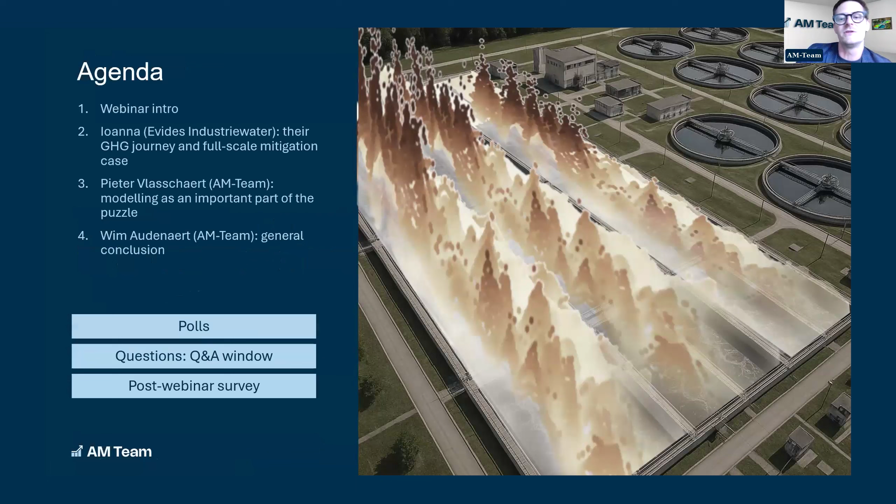So what is the agenda? What is the menu for today? I will start with a small intro of this webinar and set the scene a little bit on the nitrous oxide emissions. And then we will have a very exciting lecture by Ioanna from Evides Industriewater. So she is our guest speaker. I will introduce her a bit later. And she will be talking about their journey at Evides Industriewater, but also a full-scale mitigation example. So she will be presenting quite a bit of slides that have valuable information.

And then we have Pieter Vlasschaert from our team. He will be zooming in further on the application of modeling, because we believe it can really, and it is actually, playing an important role already in that puzzle. And I will end with the general conclusion.

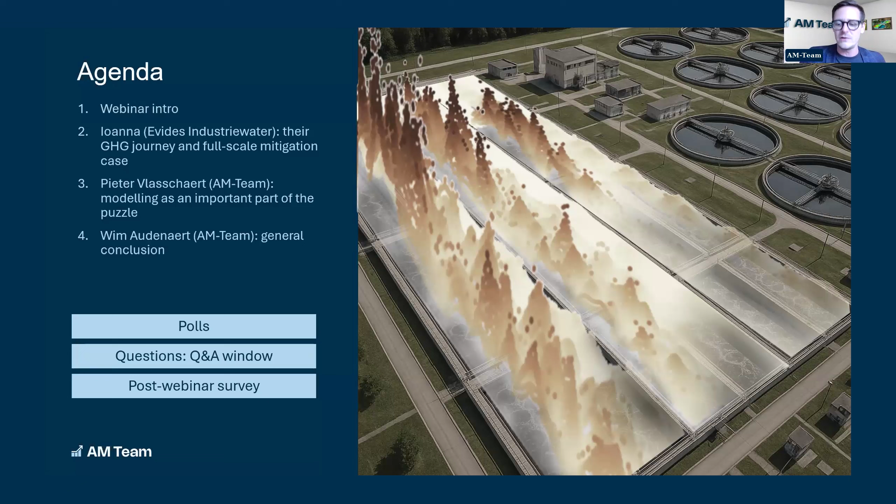Small introduction, one slide about AM Team, just in case you don't know us yet. We provide modeling and data services and digital twin solutions to the water industry worldwide. Specifically, we focus on big challenges. It is not only nitrous oxides, it can be also a lot of other topics, including reuse, micropollutants, wastewater treatment, enhancement of drinking water treatment plants, digitalization. So all of these things together.

We are headquartered in Belgium, but we have a global reach. You can see some of our customers on this slide. They are quite international. And we assist those customers in the planning stage, in the design stage, in the operations stage. And now digitalization is a topic on its own as well. So we also built digital twins for these customers. And we work very closely together with all of the stakeholders. So this means engineering companies, software companies, sensor companies, utilities, and users. We work closely together with them, because our core focus is building these digital twin models and the computer models. And then we work with other partners and solutions.

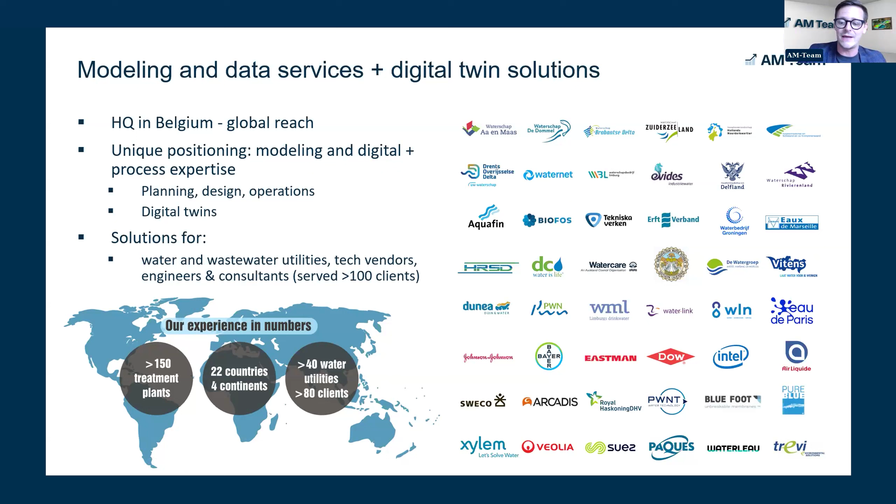So up until now, we have served over 100 clients throughout the last 8 years. So it's really adding up a lot. And specifically in the area of nitrous oxides, it is growing.

So I am Wim Audenaert. I'm CEO and co-founder of AM Team. And I will be presenting part of it today. But then we have another presenter who is my colleague, Pieter Vlasschaert. He is the VP Sales and Solutions within AM Team. Pieter will be zooming in on some topics of the modeling and the applications at full scale. And then we have our guest speaker, Ioanna Gkoutzamani from Evides Industriewater, and she will be going over their journey and a full-scale mitigation case example.

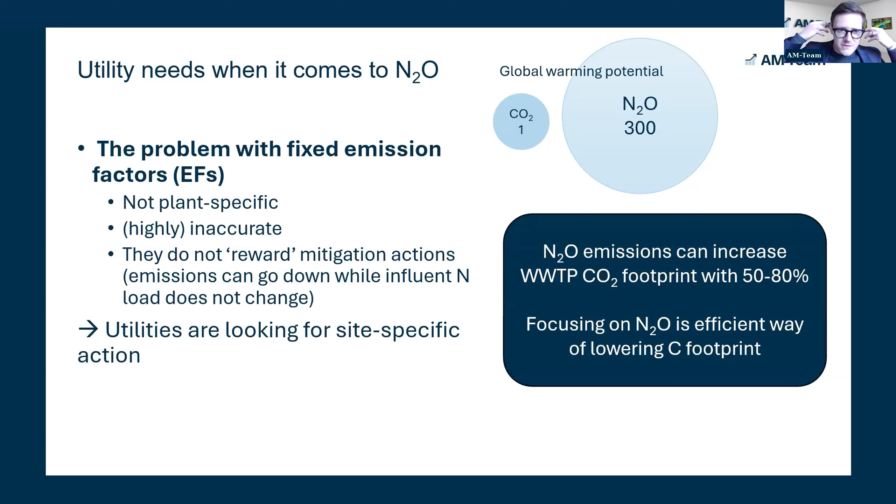So there are a couple of flaws here, and this is why an increasing number of utilities are looking for site-specific action. And action means you start quantifying or monitoring on sites, you start modeling, you start mitigating, you are starting to think about site-specific nitrous oxide emissions. When it comes to those actions, there are actually 3 big groups utilities are looking for right now. That's what we learned when talking to a lot of utilities.

The first one is quantification. You want to know do you actually have an issue and how bad is your issue? What are we emitting and what are the emission dynamics in the long term, short term? Then the second question is, okay, when we have those emissions, we should understand what is causing it and what is the potential to reduce so we can make a plan. So this is the understanding phase.

And then we also have mitigation, which is the end goal, in fact, how to reduce our emissions. So I will repeat again, even though quantification and understanding are very important, the real end goal is mitigation. We should really not forget this.

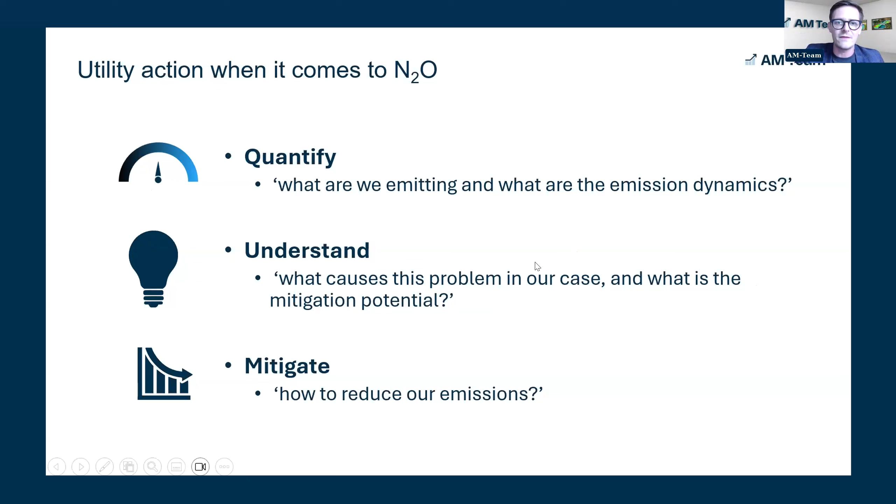So when we look at the mitigation actions and when you mitigate nitrous oxides, it is important that you don't forget the core needs of a utility. You are still treating wastewater, and that is there for specific reasons. You want to meet a certain effluent goal with a certain plant efficiency. And of course, recently now we have to juggle this third ball of the emissions. It is important that if you reduce emissions, you don't hamper process efficiency or effluent quality.

And the good news is, this is what we call the 3 E's. The 3 E's can be handled together when you are mitigating. And Ioanna's example will also illustrate this, okay? But this is very important. The core focus of wastewater treatment is to treat wastewater and achieve a certain quality with a reasonable cost and efficiency. And of course, with as low as possible emissions.

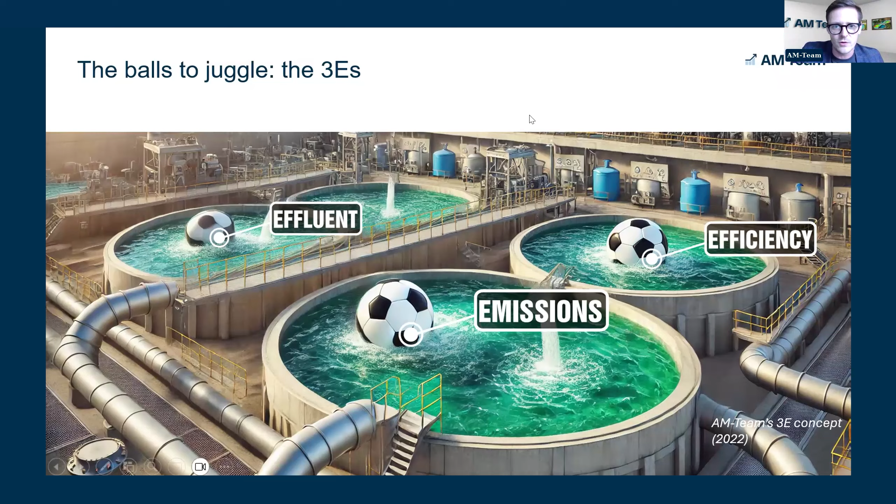That is super important. So I will quickly introduce the project now that we worked on together with Evides Industriewater. Ioanna will start talking in a few minutes. This is about a full-scale plant in the Netherlands, and I want to provide some context that is important for you to get the case very well. The first thing is, Evides Industriewater was actually in the process of quantifying their emissions already. They were quite an early adopter. They already do actions for quite a while.

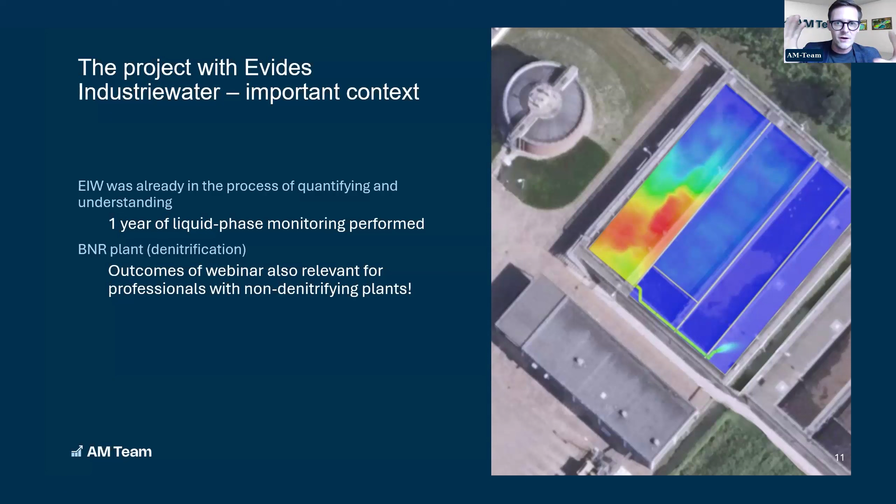And at the very moment that we started working with Evides Industriewater, they were already measuring at that site for 1 year with liquid phase monitoring. These are the Unisense sensors. This is a BNR plant, biological nitrogen removal. This means you have denitrification taking place. A lot of the mitigation actions will be on, for example, the denitrification. Despite that fact, people here in the webinar that don't have denitrification can, of course, also learn from that. I just want to highlight that. See it as a generic mitigation learning experience, okay?

And this brings us to Ioanna, our guest speaker. I will quickly take my notes here so I can properly introduce Ioanna. So Ioanna is a process engineer at the R&D team of Evides Industriewater. She is focusing on various topics, including reuse, resource recovery, and of course, nitrous oxide emissions reduction and research. And her background is civil engineering from Aristotle University in Thessaloniki in Greece, with a specialization on hydraulic and environmental engineering. And her master's was in Delft in the Netherlands in water management, at Delft University of Technology, quite a well-known institute. So, Ioanna, we are very curious about your presentation.

Perfect. Thank you, Wim. Hello, everyone from my side as well. As we explained, we've worked together in Evides Industriewater with the AM team to quantify and mitigate laughing gas emissions, nitrous oxide emissions, in one of our full-scale plants. We have prepared a few slides to take you with us in this journey. First, some information about Evides Industriewater. We are providing customized water solutions for industrial clients, and that can be process water for several industrial processes like cooling, but also demineralized water and wastewater treatment.

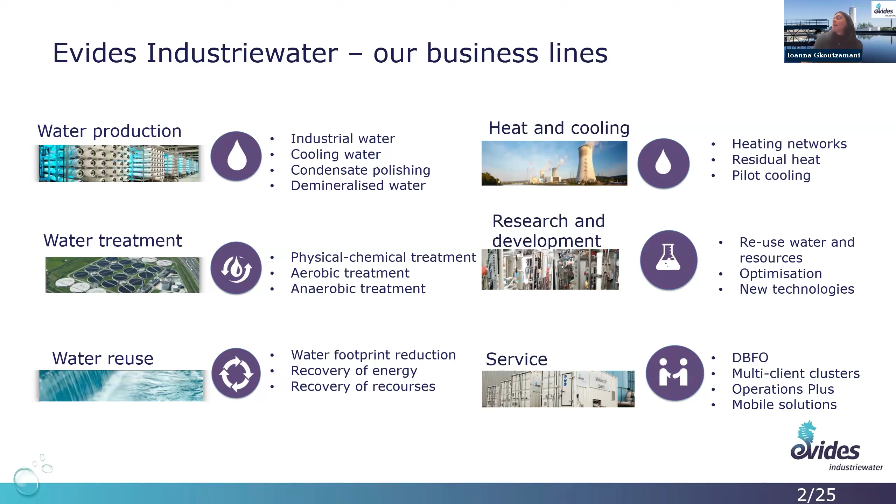We are focusing a lot on options for water reuse and resource recovery, and this is also the focus of our R&D department, but also we are trying to find ways to optimize our existing processes and minimize energy use or lower our N2O emissions. And this project belongs to that part of the company. So in general, our environmental policy is that we try to reduce our CO2 footprint, use more renewable energy, reduce our emissions, and of course, not contribute to water scarcity. So have better recoveries, reuse water as much as we can, and reduce our pollution to the water bodies. So there are ongoing projects for all these fields.

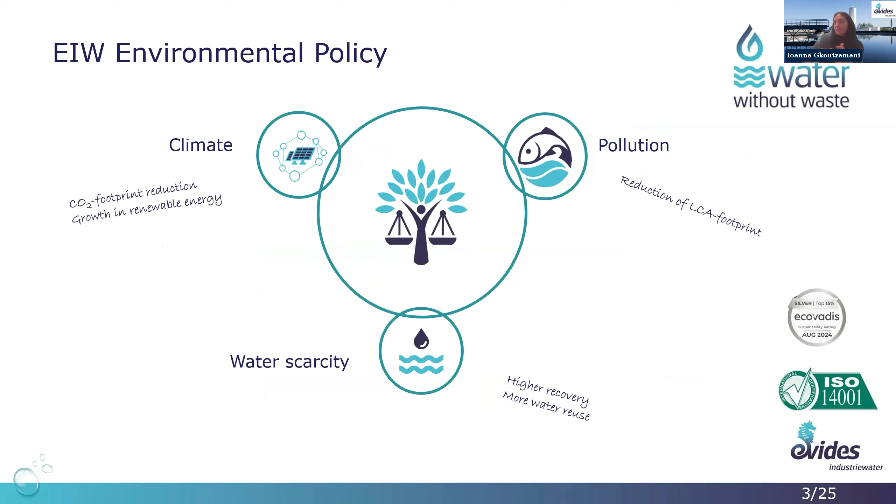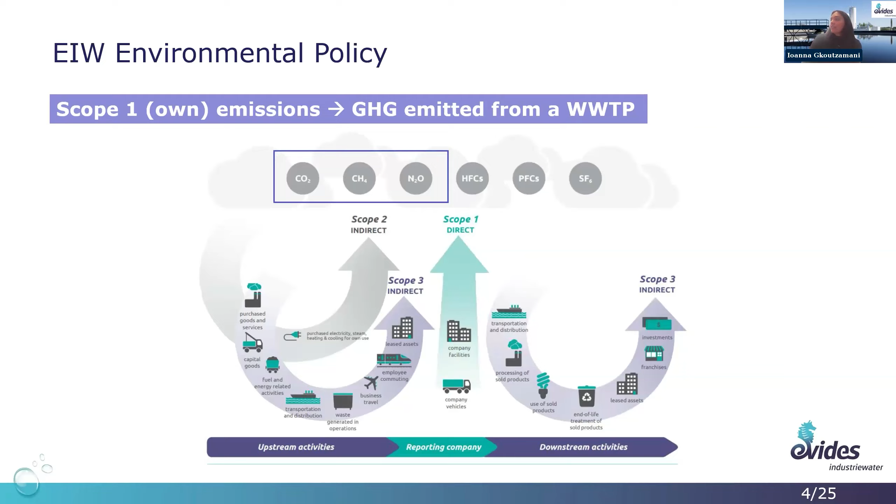And then specifically for the greenhouse gas emissions from wastewater treatment plants, the main three contributors are CO2 emissions, methane, and nitrous oxide. And the nitrous oxide, based on literature, is one of the biggest contributors, as we mentioned. But this is something we have already seen.

Then the aim of this research was at first to quantify the emissions, to know our baseline, knowing what laughing gas is being formed at which moments. Thereafter, to understand why it's being formed. So what are the formation mechanisms and what factors that we might be able to change contribute to this formation of laughing gas. And finally, of course, try to identify mitigation measures and implement them.

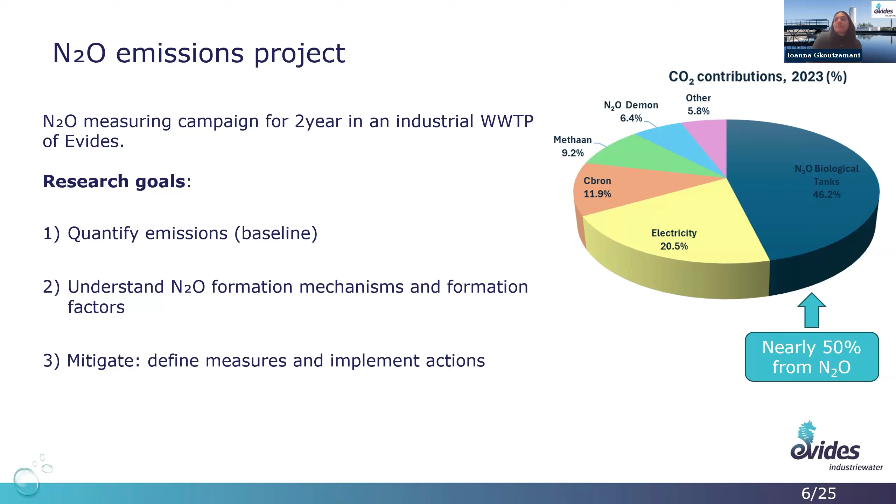So a few information about this industrial site. It's a conventional activated sludge system with denitrification and nitrification. The influent, even though it's called industrial plant, is similar to municipal, but it's much more concentrated, like 5 times more concentrated than typical municipal, and has less COD compared to a municipal. And also the daily and weekly patterns are different than a municipal plant. And of course, for a laughing gas research, the focus was in the denitrification and nitrification tanks, specifically here highlighted with red.

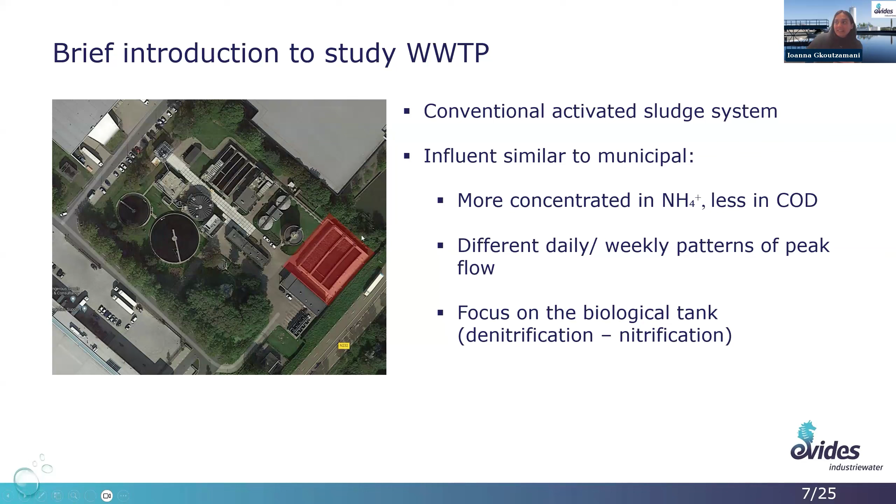Then the approach followed. First, as we said, we wanted to measure. So we chose for liquid phase nitrous oxide monitoring. That's already happened. Then we followed with data analysis from our side, and also in collaboration with Brunel University of London, we had a multivariate analysis. And thereafter, we proceeded with model-based root cause analysis and model-based mitigation strategy testing with the AM team. And now that we have found our mitigation measures, that I will come back to later, we are in the phase that we are trying to implement them in full scale, and thereafter continue monitoring to be sure of the effect.

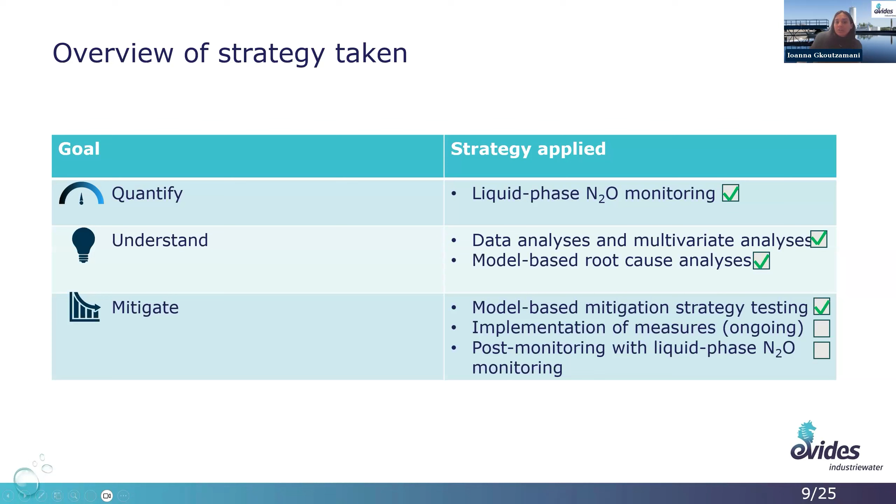Then, for the measurements, we chose the Unisense sensors because they measure in the liquid phase. We know that measuring in the gas phase might be more accurate when it comes to the actual emissions estimation, but if you want to identify mitigation measures, you need measurements inside the water, because you want to be able to compare the moment you see a formation of N2O with what else was happening at the same moment. Because if you measure in the gas phase, what is being emitted in the air at that moment might be formed a bit earlier.

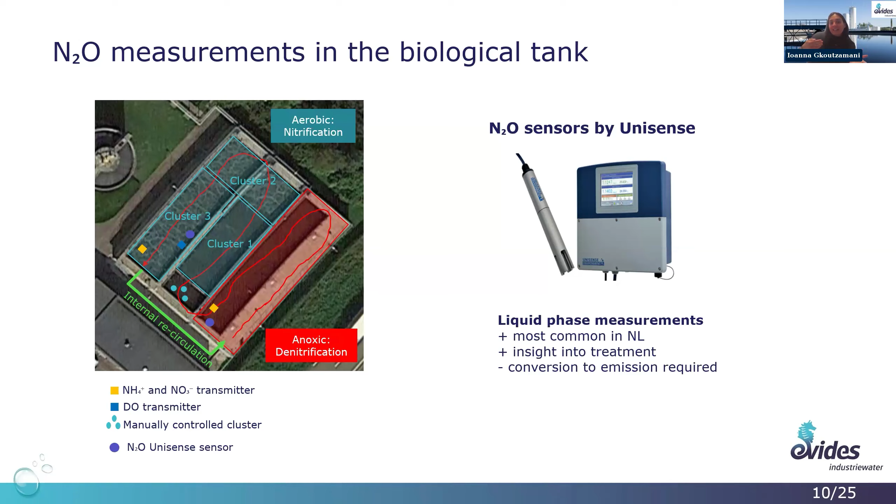Then let's go to the main outcomes. So 2 years of measuring campaign from December 2021 until January 2024. What we have identified: the average formation factor comes really close to the IPCC number, around 0.016 kilograms of laughing gas per kilogram of ammonia being treated. But this is the average of the 2 years. If you take different periods, at some periods it will be much more, and at some periods much less. So there is a seasonal profile with higher formation when the temperature of the water goes down, so during autumn and winter. And thereafter, we also found a daily profile that was repetitive, and then a mitigation measure that was identified and tested with a model of AM team.

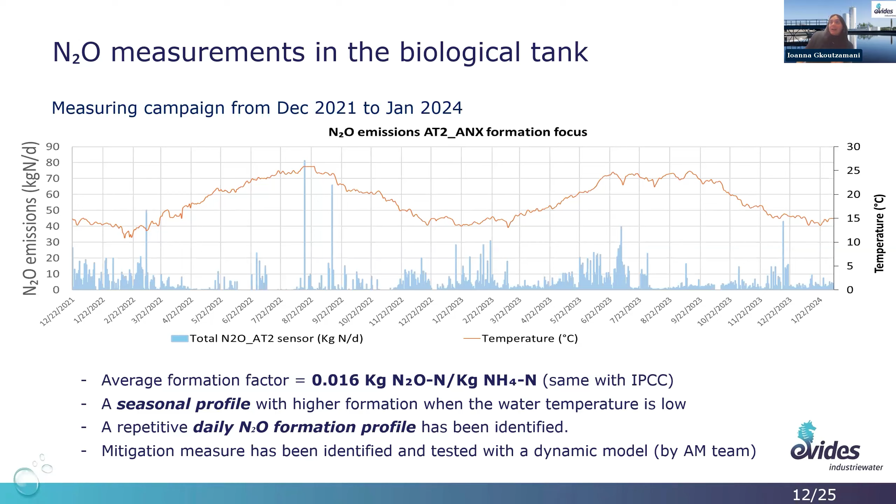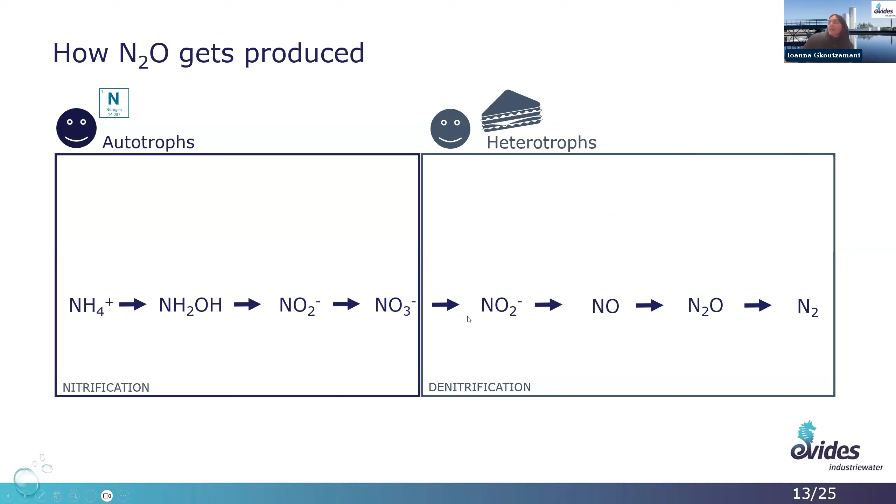Now, before we go into details of what all these things mean, let's remember what N2O is and how it's being formed during nitrification and denitrification. So here we have nitrification from ammonia to nitrate, and denitrification from nitrate to nitrogen gas. Then you have 3 main pathways. In the nitrification, it's through hydroxylamine oxidation, when you have high DO and high ammonia loads incoming to your tank, or the other pathway that is through AOB denitrification, when there is low presence of dissolved oxygen and high concentration of ammonia or accumulation of nitrites.

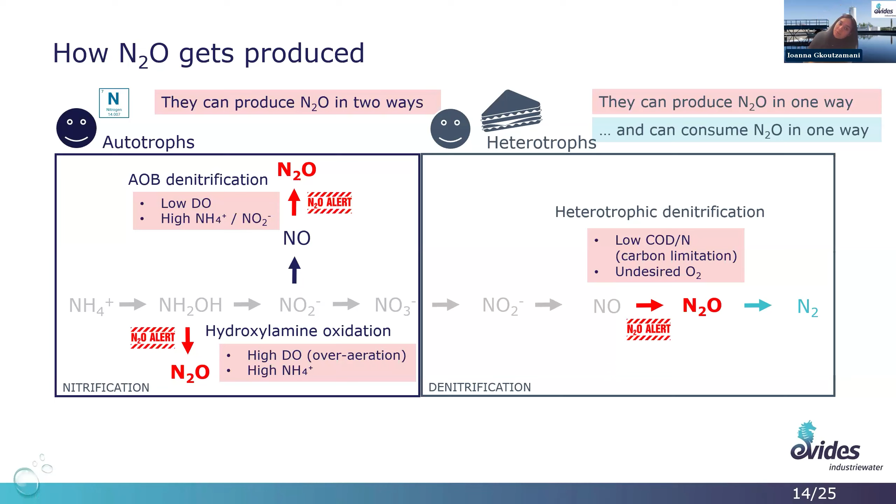And then in the denitrification side, the heterotrophs are able to produce N2O, but also consume it because it's an in-between step during denitrification. But to do this, they need COD, a carbon source. And if you have carbon limitations compared to the amounts of nitrogen coming into your tank, then you might stop at an earlier step of this process, either at NO2 or N2O. And both would end up in the formation of N2O, because accumulation of nitrite will end up, by AOB denitrification, becoming nitrous oxide. So this is how it was formed. And now let's have a look at the daily repetitive profile. So you can see here, well, one moment.

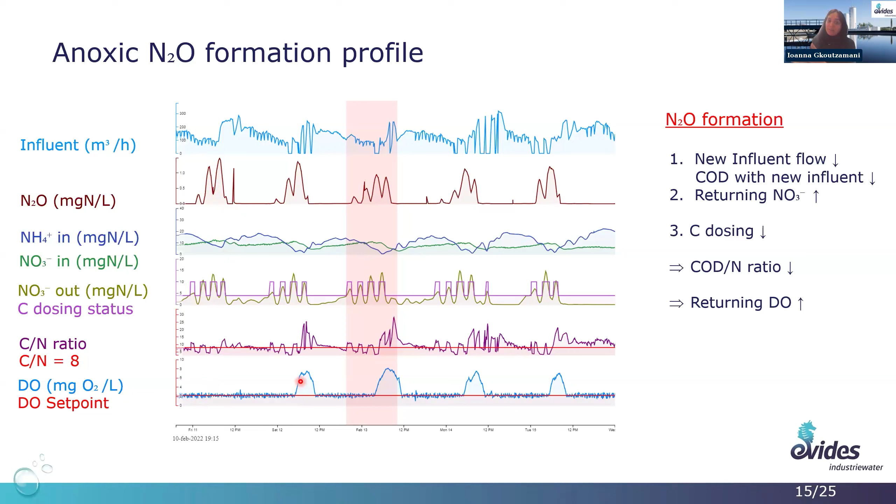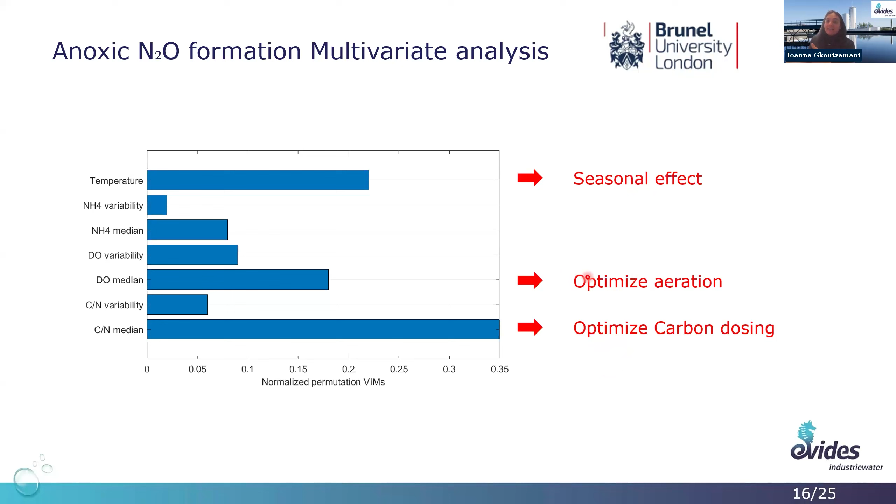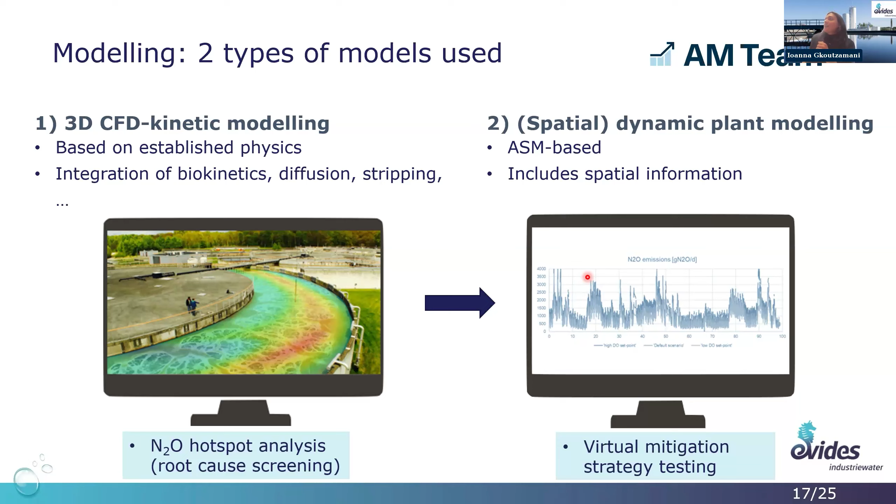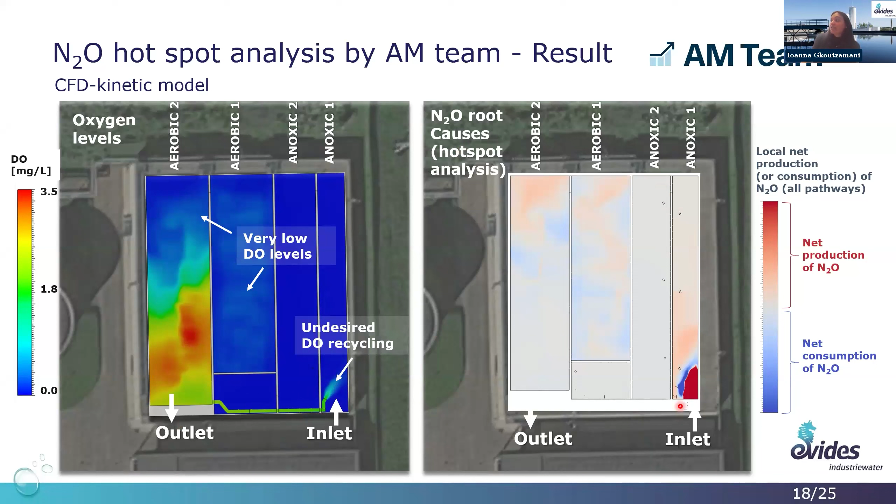And on the right picture, you see the N2O production and consumption throughout the whole tank from all the pathways. And then we could see some net production of laughing gas that was caused, for example, by the returning oxygen, so AOB denitrification at the point of the return. Don't be confused by the intense two colors, because these are from the main production and reduction of laughing gas during denitrification. Then you also have N2O production due to carbon limitation. And then we could see also N2O production due to low dissolved oxygen during aeration, and that's again AOB denitrification.

And when AM Team took all these parameters together and quantified them, we were able to see that the biggest contributor to the N2O formation in this specific case was the nitrifier denitrification, so AOB denitrification, but from incomplete denitrification and accumulation of NO2. So we will have lack of carbon that will result in incomplete denitrification, that will result in accumulation of NO2, and this NO2 was everywhere in the tank, and AOB could take this NO2 and make it nitrous oxide.

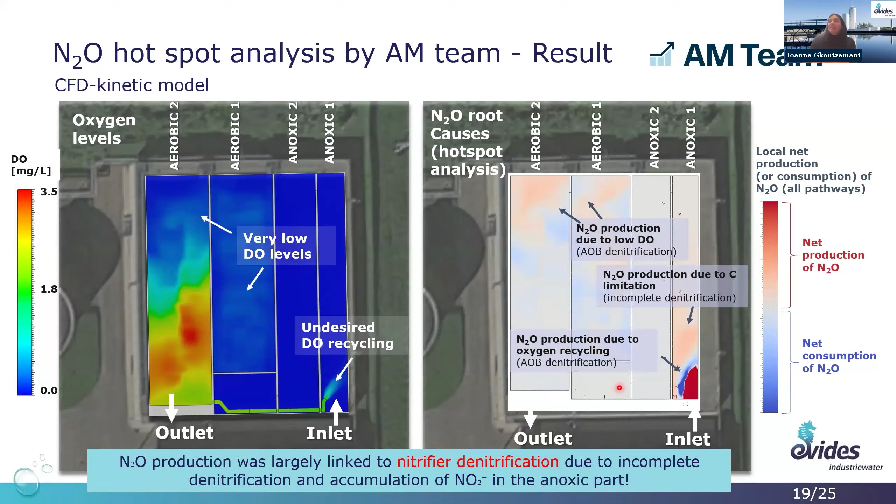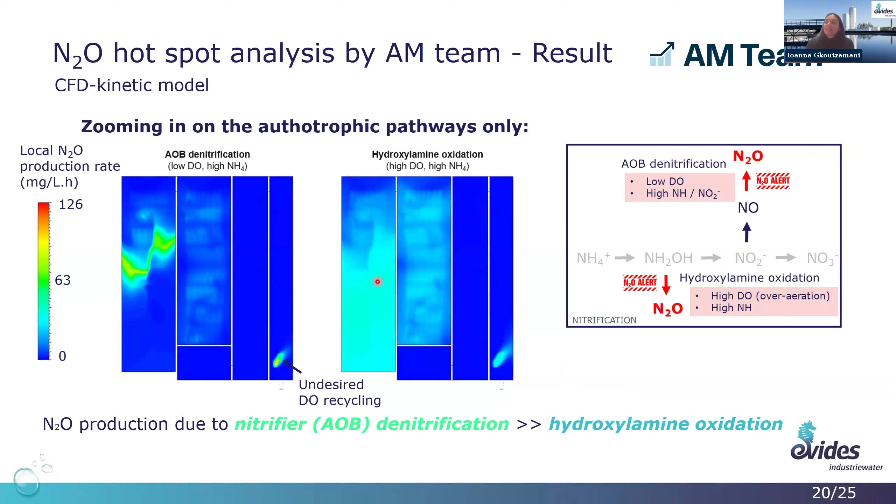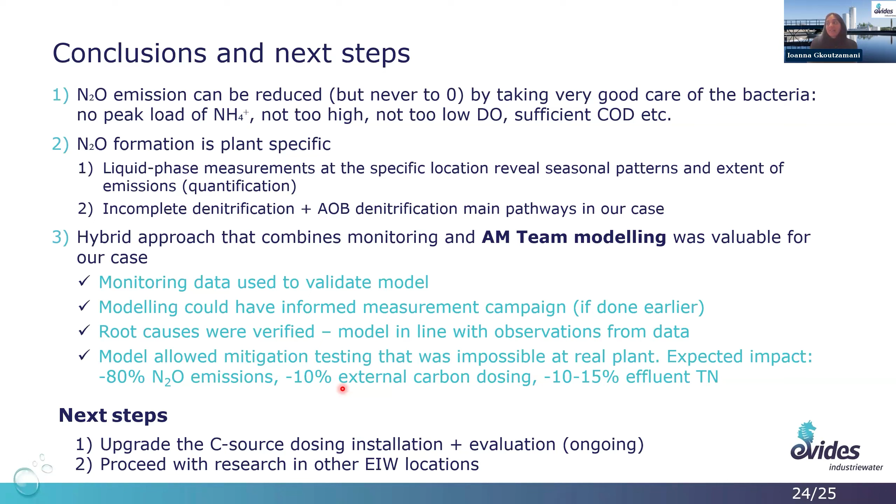So the next steps are to upgrade our carbon dosing installation and evaluate, and we are right now working on this. And we proceed with research in our other Evides Industriewater locations. So that was my presentation.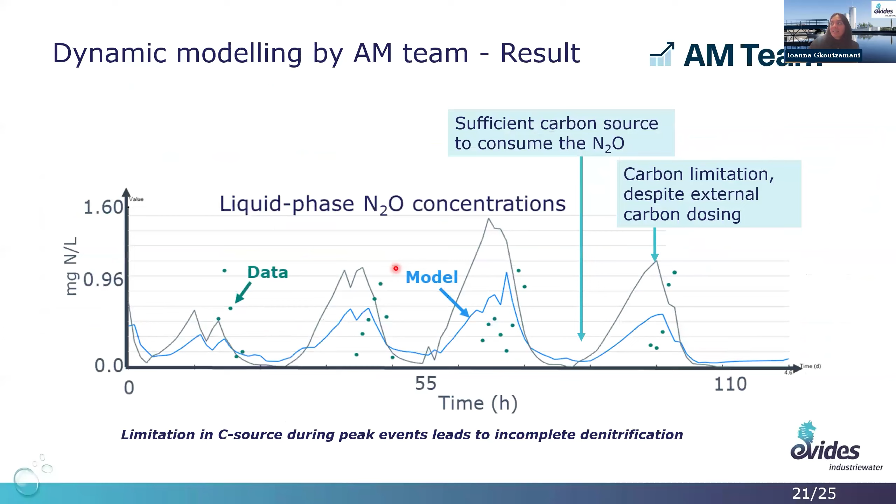There are no data, green dots, in the other scenarios. Correct. Yeah, because this is a model, so the actual measurements are only in the base case. And we see that the model, the blue line, coincides quite well with our actual data. And then for the rest of the scenarios, you can imagine the actual data at the same moment, but it's what the model virtually expects, and we didn't test them in full scale.

We are going to implement it in full scale once we upgrade our carbon dosing based on scenario 5, and then we can validate our expectations in real life. But we believe it will work, and we are going to do a really big investment to implement it, because our carbon dosing upgrade needs quite a big investment, I would say. Because we have validated this outcome from our own observations, from a statistical analysis, but also from a dynamic model that takes into account the biology behavior.

And then related to those investments, Ioanna, we have another question. What is the main driver for Evides Industriewater to really work on this and even invest in this? Laughing gas reduction. Correct. So in Evides Industriewater, they take it quite seriously right now. We have dedicated studies on methane and nitrous oxide formation in all of our plants, trying to understand where we stand and wherever we can find mitigation measures.

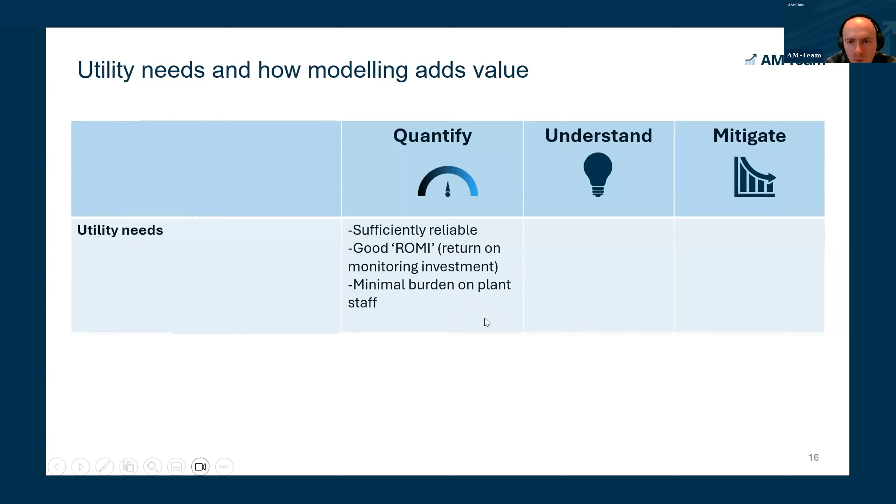But if we zoom in a little bit more on the quantification needs, quantification really comes with challenges, and I think it's extremely important for utilities, if you want to quantify the emissions and assess your baseline, that this quantification is done sufficiently reliably. For example, it means measuring at the right location to quantify your emissions, because there are so many gradients in reactors, you need to find the good spot depending on your reactor. And then also, if you have a lot of different wastewater treatment plants or very big reactors, it's also very important to have a good return on monitoring investment.

You will do measurement campaigns, but is it a good idea to measure for 4 years, for 5 years? How many sensors do you need? So a good return on that is extremely important. And also, all these measurements need a lot of calibration. So you also don't want to burden the staff too much. So there you need to find a good balance. And then understanding: Ioanna clearly indicated how models can help there, but it's important to get value out of the data apart from the quantification, that you really understand why your emissions are being formed, that you also generate generic learnings out of that you can apply in new designs, for example.

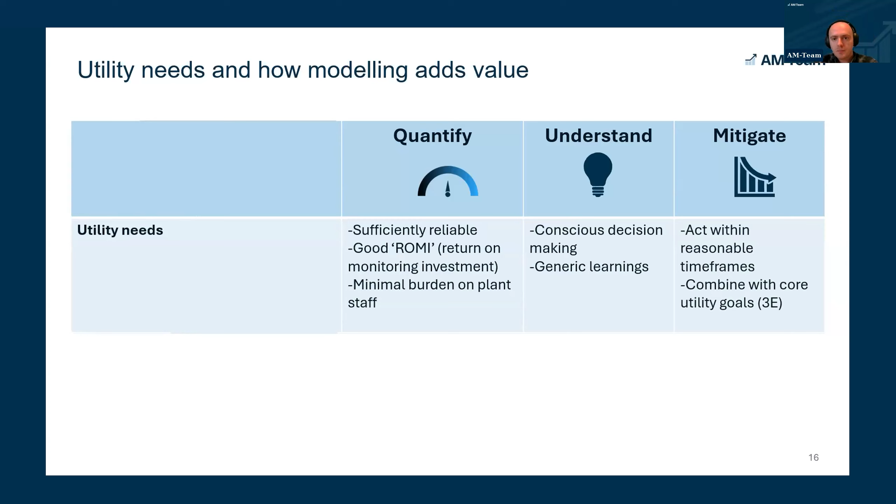And then when we come to the mitigation, you want to act as fast as possible. If you have to do trial and error on site, it's very difficult. Also, Ioanna mentioned we will need to do huge investments for implementing these mitigation strategies. You don't want to do this trial and error with those huge investments. So taking that into account is extremely important. And of course, effluent quality and efficiency are important to take into account. So this summarizes a bit the needs for utilities in those three fields.

But then on top of that, this is all for existing plants, but also when you are retrofitting a plant or you're building a new plant, you can also prevent N2O emissions or big N2O emissions. So a clear need for utilities is also to take into account the N2O factor in new designs or in planning of new wastewater treatment plants.

And there, our models can really help designers and utilities. And I will frame a bit the type of models that we use there and that we developed to help the customers with that. So on one hand, it's indeed the 3D CFD kinetic model, which is based on physics and biochemistry. So it's all integrated into a 3D model, which allows you to really see in 3D the hotspots of N2O production, like Ioanna mentioned, but also the dissolved oxygen concentrations, ammonia profiles, etc., and gives you a lot of detailed information, which helps a lot also for new designs and retrofits, for example, because you also can change aeration location, mixer location, in- and outlets, etc. So that's the one model.

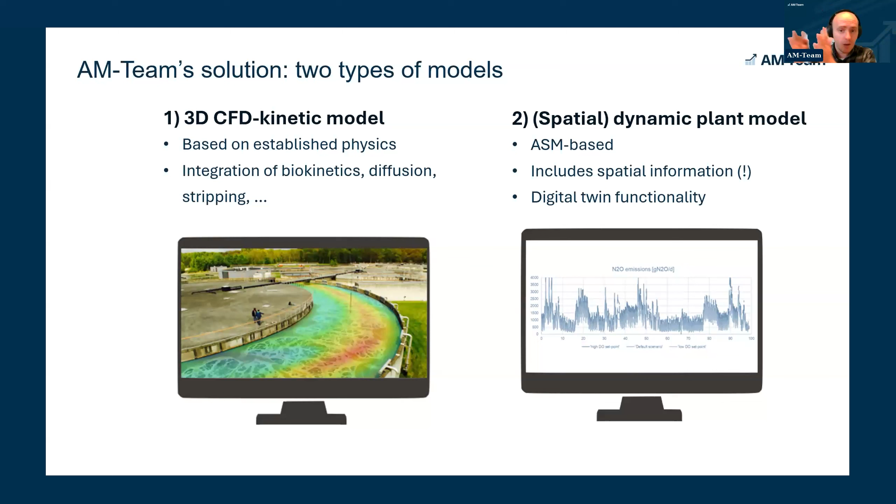And on the other hand, you have the dynamic model, which contains the information from the CFD model. So the hydraulics is taken into account, and that model can give you long-term predictions of N2O and can be used to test mitigation strategies as well. Operational mitigation strategies, changing DO, changing everything you can change in the operation of your wastewater treatment plant, and it can also be used as a digital twin. So a soft sensor for N2O prediction, and in the long term also to do model-based control, for example.

So you have seen the needs. How can modeling and the two tools we have help in all those needs? So in the prevent stage, these models can really help define an optimal design and the optimal operational strategy for this new plant or this retrofit. So before constructing it, already taking into account N2O, minimal N2O by design. And then with the quantification, it gives an idea of the initial emission risks. It can really support your on-site monitoring, defining the right location, and this gives additional data out of your bioreactor, and refines the quantification because you see the complete picture and not, for example, one location only. So that's where it can help.

And then the understanding, I think Ioanna made it already very clear. It can really look in 3D and over time into emissions and effluent quality, which gives you a lot of additional insights. And of course, in the mitigation field, you can use the model to virtually test mitigation strategies without having to test them all in practice. And then it can go to the real-time digital twin.

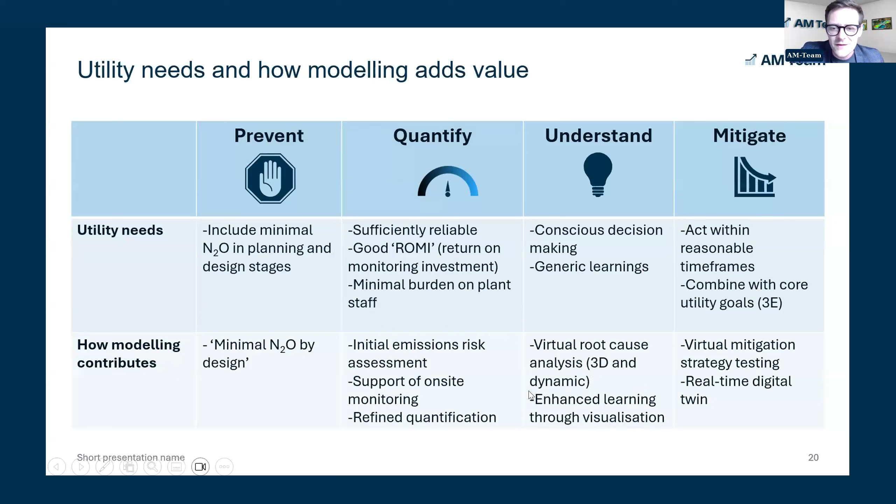I think, let me think. I think, yeah, this is an important one. What I also wanted to stress is this one. It might seem a little bit weird, enhanced learning through visualization. But what we have seen is that when we work with a lot of plant staff, nitrous oxide is not so easy to understand, because we are familiar with linear processes.

Nitrification is linear. Ammonia, you add oxygen and it goes to nitrates. It's linear. Nitrous oxide is not linear. It happens at various spots. It goes up and down. It gets consumed, produced. It gets transported. It gets stripped. Now, these visualizations are extremely helpful to really increase the learning curve of plant staff.

And yeah, I just wanted to highlight that a little bit. It's beyond mitigation. It's beyond quantification. But it's super important to get people involved. General conclusions.

Well, the core needs of practitioners, we feel we need to be focusing on maybe a little bit more as an industry, is return on monitoring investment. It is very important that we do quantification and that we know what the baselines are, because we know how non-useful the fixed emission factors are. Super important, but we need to ask ourselves the question, okay, how are we going to do this at the global scale for many plants and for the coming decades? So return on monitoring investments is super important.

Hopefully, we can also have generic principles and learnings. Yes, it is plant specific, but of course, there are patterns. There are patterns for sure, over aeration, under aeration, carbon limitation or not. And we need to make them visual.

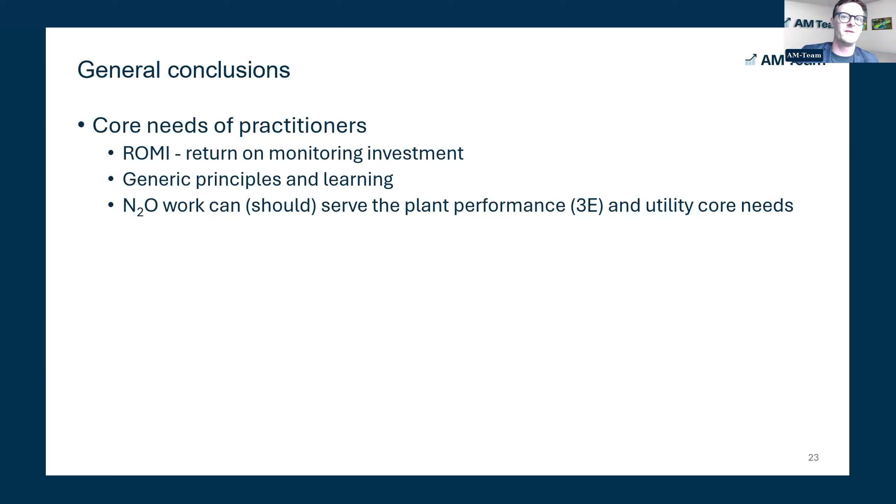Also, N2O work, and we try to convey this a little bit in the webinar, should also serve the core focus of a treatment plant, because typically people are very busy. There is a lack of staff. There is even a risk of experienced people leaving. So we need to do it smartly. And if it serves the business case, of course, people will be very motivated to continue reducing N2O.

The take-homes of Ioanna's story were that there are 2 root causes identified, and you could see in the hotspot analysis that one of those root causes was acting in 2 various spots of the treatment plant. So that was interesting to see.

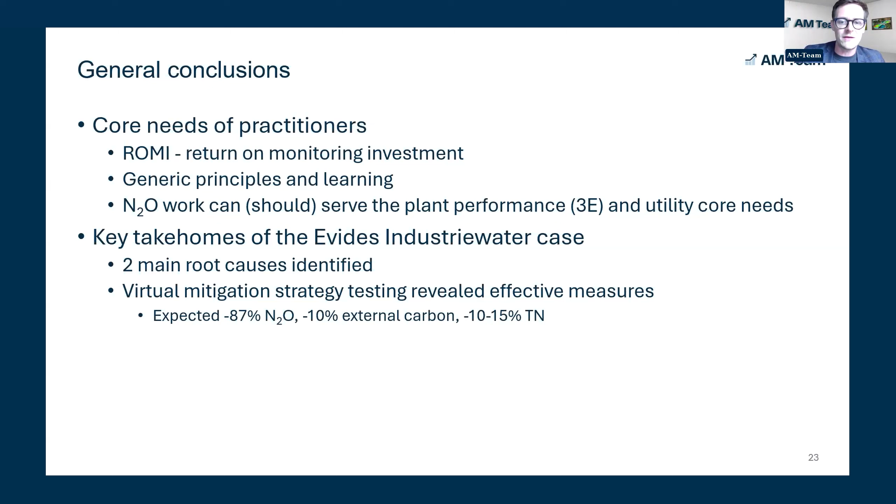And there is a significant reduction potential expected. Yes, we have used the model to test virtual mitigation strategies, but of course, a reduction of -87% predicted, you can really not neglect. And it was completely in line with on-site experience. That's really important to add. Savings of operational costs are expected as well, and total nitrogen improvements.

So as Peter mentioned, we strongly believe in hybrid concepts for the time being. This means you combine data with modeling, and you try to use the best out of both. But we believe this will not only lead to more efficient action in that domain, but also, and that's more important, faster action towards mitigation. Because that's what I mentioned in the beginning of the webinar. There is only one end goal in the end, which is mitigation. And this is really what we should not forget.

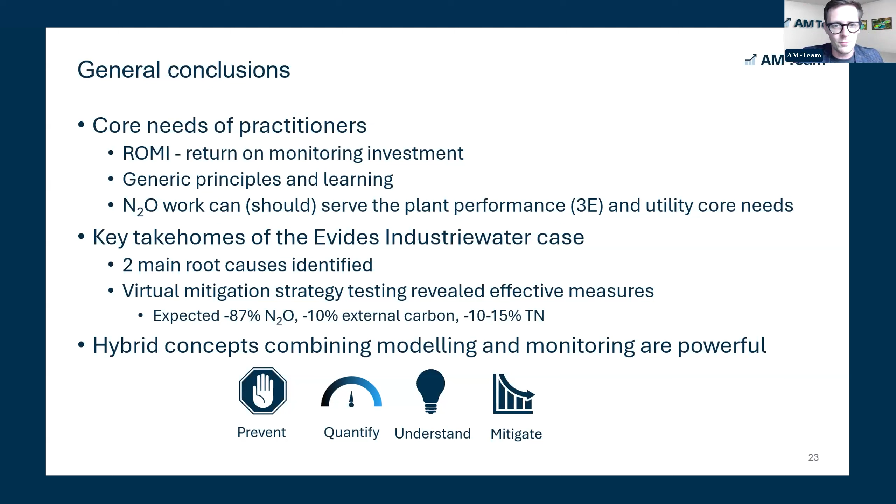So the prevention and design, even when there's no plant, no data, is super important. And then we have the quantification, the understanding, and the mitigation. So these were the 4 pillars we tried to highlight.